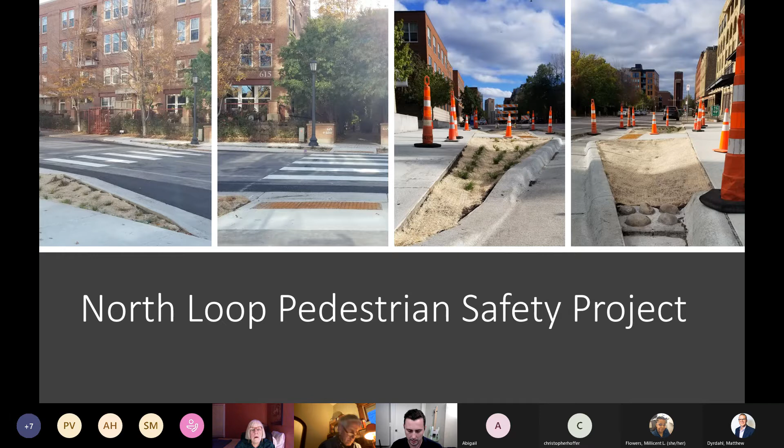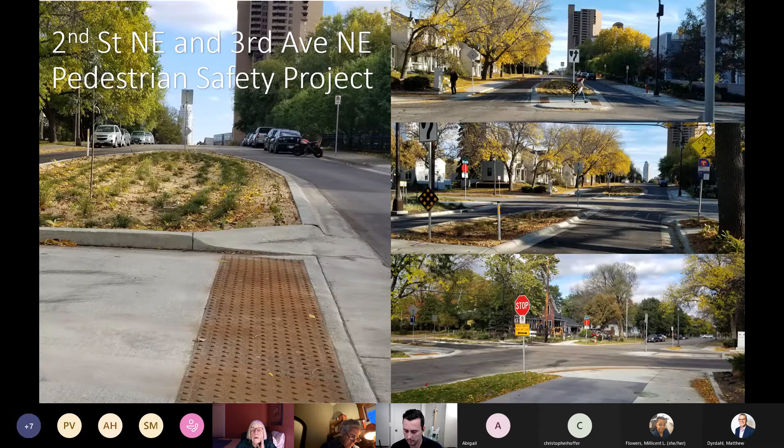And then over in Northeast here, this used to be my old commute route, so I wish this was in place a couple years ago. A nice new addition on 2nd Street Northeast and 3rd Ave Northeast—also a pedestrian safety project. Both of these come out of our BP 004 program, our pedestrian safety program, which the PAC historically advocated for and helped push to get that funding to exist in the first place. This project put a median on the intersection to help with crossing distances and allowed taking one lane in each direction. It also has that 3rd Ave trail on one side of the intersection, so they built out that protected aspect as well.

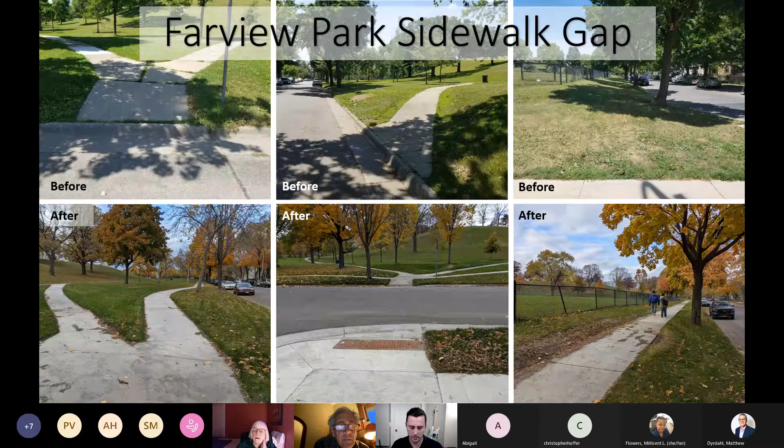The Farview Park sidewalk gap—this is in North Minneapolis, and there was just a sidewalk gap along the park there. Katie White worked on this. The photos don't show it quite as much, but they also used this beyond just the sidewalk gap—I believe they added a bump out at one of the intersections and improved the crossing safety there. I'm pretty sure this is around where that Safe Routes to School project, the City View project, is that Barb was talking about earlier with the really high speeds. There were definitely some speeding complaints out in this area too, so they put a bump out there to help with that a little bit.

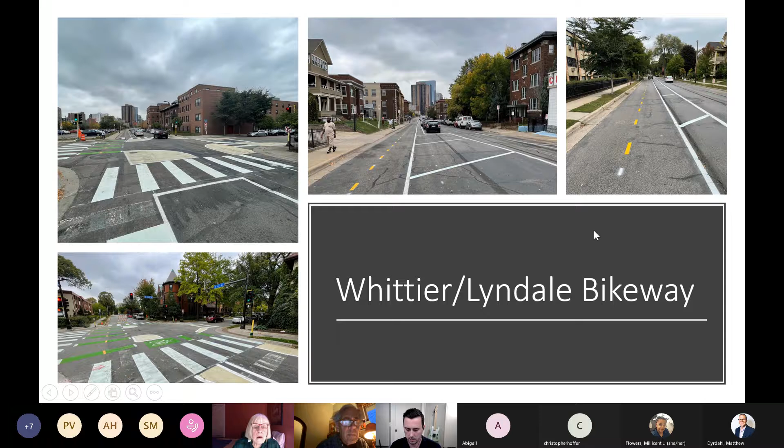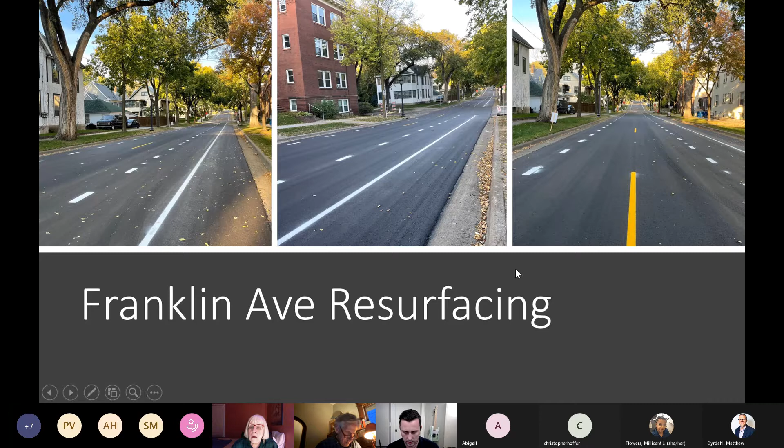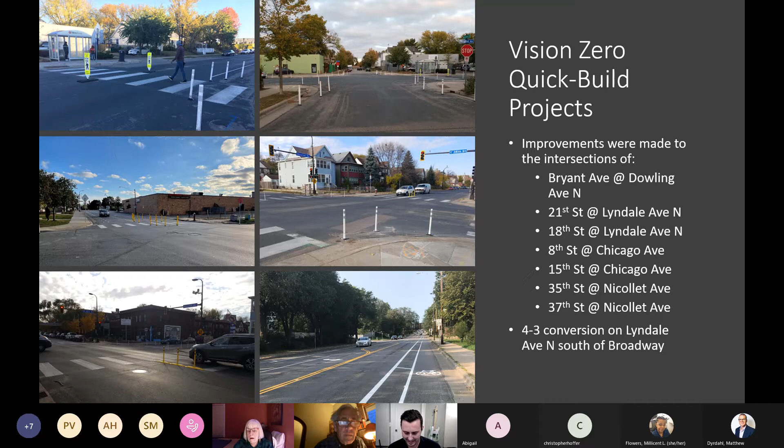And I really like this bottom right one, the 4-to-3 conversion on Lyndale Ave North, south of Broadway. I biked on that when I was going to check out my pedestrian project north of Broadway earlier this year. Previously, before this, it was just 4 lanes, undivided, and not a pleasant place to be on a bike at all - I had someone running up against my rear wheel with their car on this. So a much needed improvement out there.

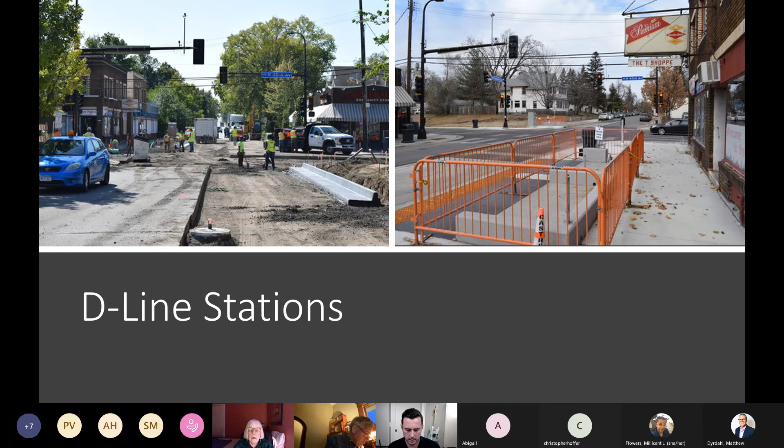And then getting into the reconstruction projects - these are the standalone reconstruction projects. I forgot to say this at the beginning, but last year when I put this presentation together, I had maybe like 6 slides because there just wasn't a lot of work. It was sort of an off budget year for whatever reason. I think it's showing up in how much work was done this year, so you'll see from these reconstruction projects that there's a good amount that was completed.

So Hennepin Ave downtown, which everyone here I believe is familiar with - we went out and took a little field trip to this one as well. That's partially done, and there's still more phases to be completed with the rest of this project.

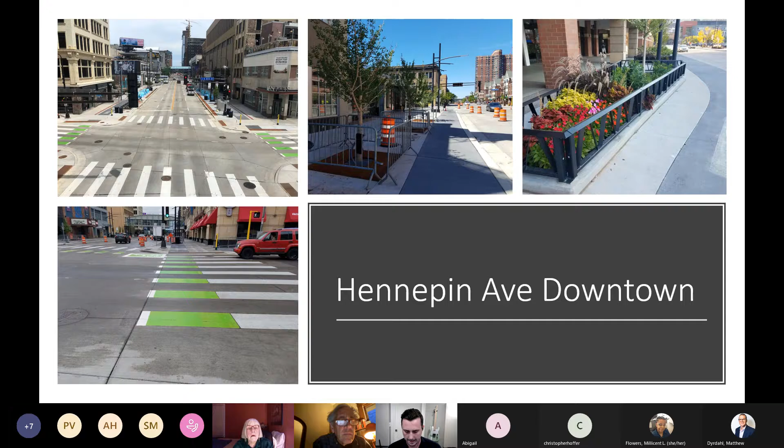And then 35W coming through had a couple projects that impacted some city streets and areas. At Lake Street and 35W, there was some work done, put in some benches and trash cans, and redid the transit stop there as well.

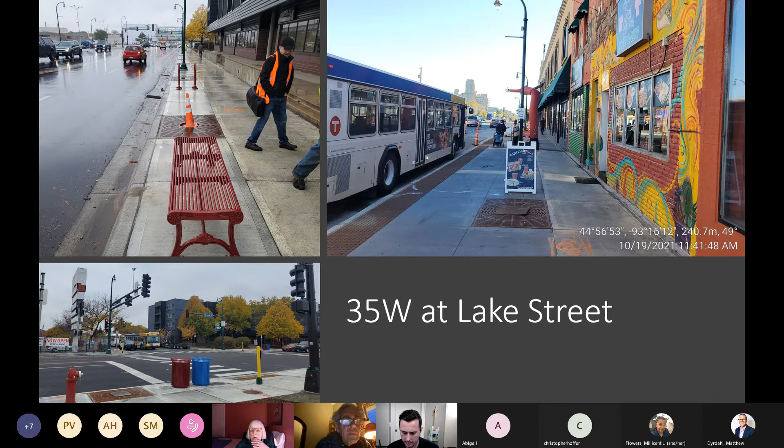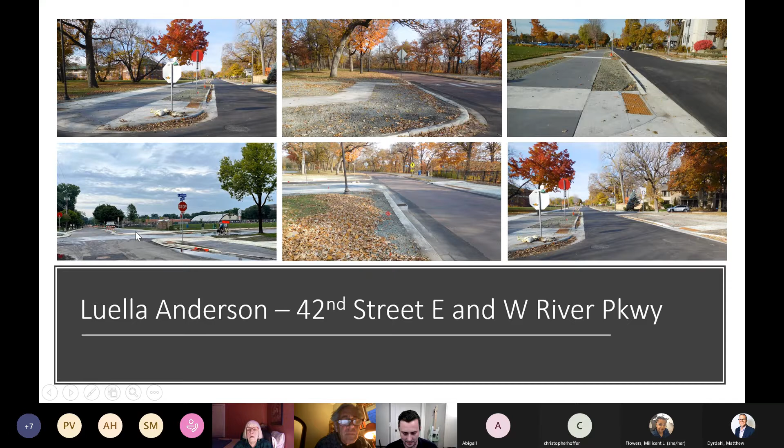Grand Avenue, they were in the process of wrapping up this construction when these photos were taken, but I believe it's entirely done now. We also took a site visit as staff, and it looks great. A lot of really narrow streets, in-lane transit stops with medians to stop cars from going around the buses. At Grand and 40th, there's a protected intersection design that'll facilitate a two-way bikeway on 40th that just came through the engineering committee recently.

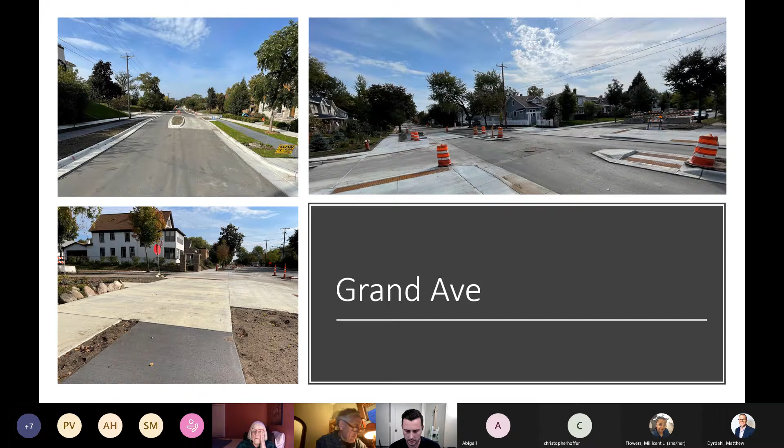And then 4th Street downtown, which is also a really cool project. Again, another raised cycle track, two-way protected bikeway on the northeast side of the street, between City Hall and Hennepin Avenue downtown. You'll see outside City Hall here some of the green infrastructure, and that green infrastructure goes along the entirety of the corridor.

It looks like maybe you can kind of see it, it's a little further back in there, but there's some cool protected elements where 4th Street meets 3rd downtown as well, with some raised curb that will stop cars from parking too close to this bump out. So cars won't be able to get any further, so that bikes can come up on here, and also so they won't be blocking line of sight for pedestrians and things like that.

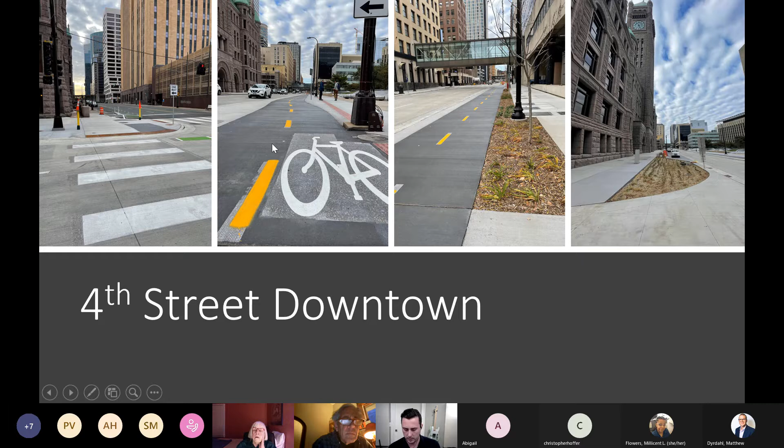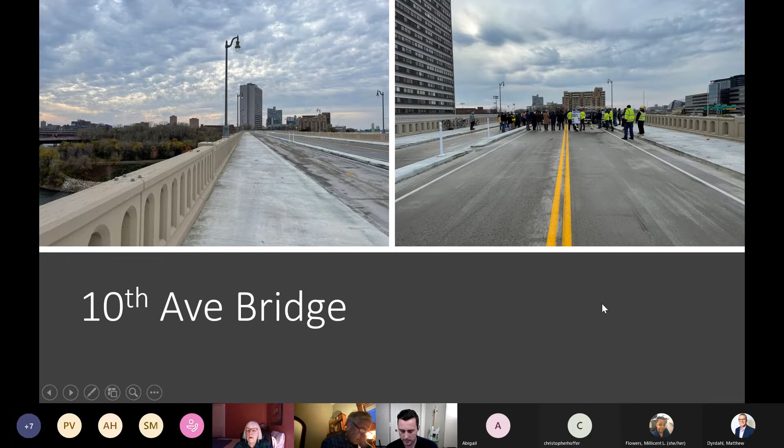Oh, one more, 10th Ave Bridge. This is a Simon Blenski project that he did most of the work on before he left the city, and it's a major improvement. Again, something I wish had been in place when I was using this bridge a lot, but a two-way bikeway, curb protected, as well as major expansions of the pedestrian realm on both sides of the street to make that a much more comfortable bridge to move along for people walking and biking.

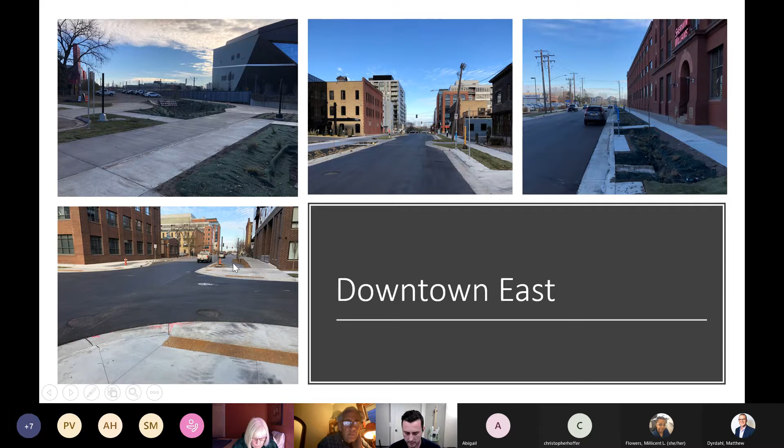And it doesn't stop. Downtown East. I think it's 10th and 3rd downtown, near US Bank, sandwiched between Hiawatha Trail and Washington downtown. There's a cool little cut-through that was added. I think it wasn't even initially proposed as part of this project, but through engagement and thinking things through, it added this connection from the Hiawatha Trail straight across to Washington Avenue, and you can easily get to Gold Medal Park from there as well. It also links up with 11th, which has this off-street protected facility as well.

And that's it. So nice to just look back on all that stuff. I think some of those look familiar to folks who've been on the committees this year, and some of them maybe we haven't talked about for a year or two with the reconstructions. But happy to take any questions or comments, mostly just wanted to show you all some of the impact you've had on our engineering projects in the last year.

Christopher? Yeah, I really appreciate that. That was great. I had sort of forgotten some of these projects, and to have them all in one stretch is great. So thank you for that.

And also just quickly, I don't know if Neil caught for the minutes that the paint delineation wasn't tan like I thought. It was actually Bailey's original Irish cream color. I think that's what Chris said. So yeah, it's very, very fancy. I didn't catch that, I just thought it was tan. So thank you. One of our planners, Trey Joyner, who you might recognize, is always talking about the Irish cream. He's been pushing for Irish cream for years, so I gotta give it the highlight.

Peter? Yeah, thanks for that. There's two things there. That 10th Avenue Bridge is remarkably slower. Just in my couple of trips across there, I found myself getting annoyed at the drivers who are driving too slow because I'm trying to take pictures. So it's really noticeable, at least in the early going. Looks great, feels great, both sides.